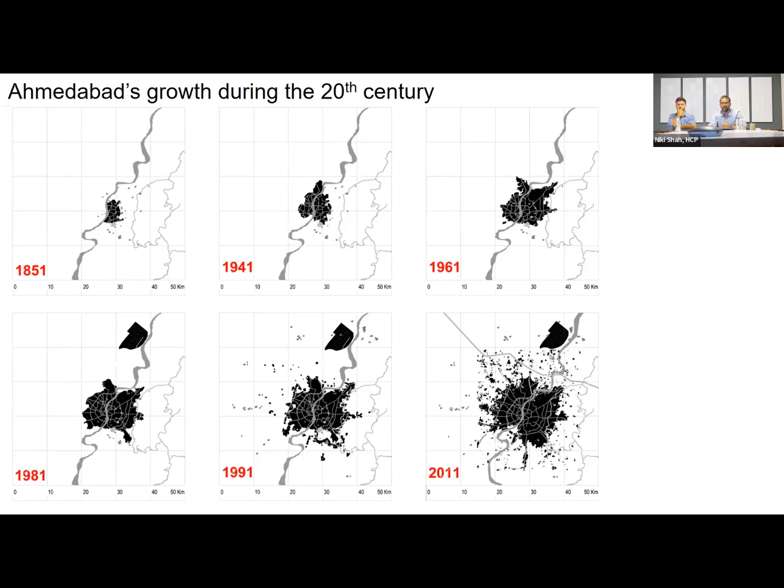It has flourished on both sides of the river, and ironically, it's a radial city - the planned city is radial in a way, and the river sits directly in the middle of it. So it grew equally toward both sides, with the river passing through the center, as you can see in this image of the urbanized area with the river in the center.

Sabarmati, like any river, I'd say the city established itself on the river for certain benefits. The Sabarmati always helped Ahmedabad get started - it was the prime, most important source of water for various uses. Eventually engineering took over, and they built French wells to get the water, which are still functioning.

Important and rich people also built recreational places - this is one palace which still exists; it's a gallery now along the river.

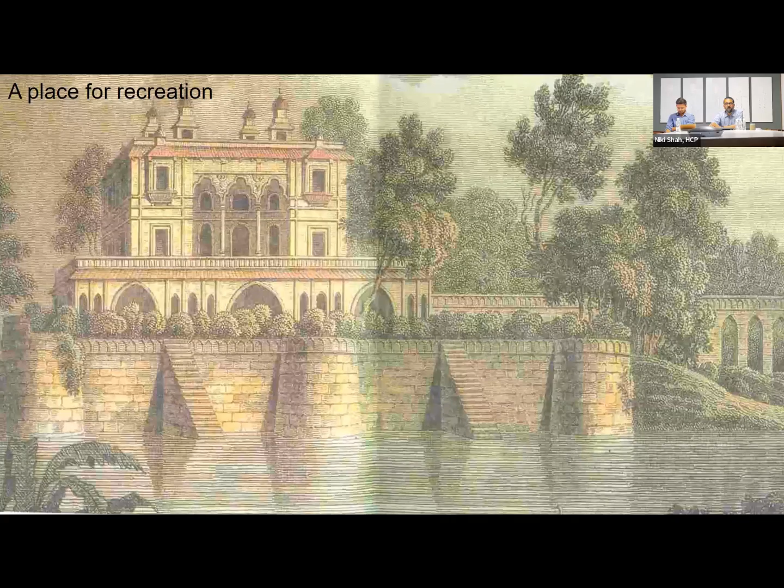Due to the nature of the river, because it was not a perennial river and was dry for many months, that whole ground could be used for multiple purposes. So Gandhiji, during his tenure living at Sabarmati Ashram, also used the riverbed as a gathering place, because that was the only easily accessible place, I would say.

And because of the sandy riverbed, people used that sand as a drying bed for clothes, due to the textile nature of the city. This is a famous picture by a French photographer who was traveling here in the 60s and took several pictures of Ahmedabad, beautifully capturing the river at that time.

This is also washing areas - lots of people used to come and wash clothes because the water was accessible.

There are smaller areas where people did local farming also, since this is part of the river. You can see the building behind is NID, the National Institute of Design - one of the premier design institutes in the city and country. And because of the free and available land on the dry riverbed, it was possible to build some houses there too.

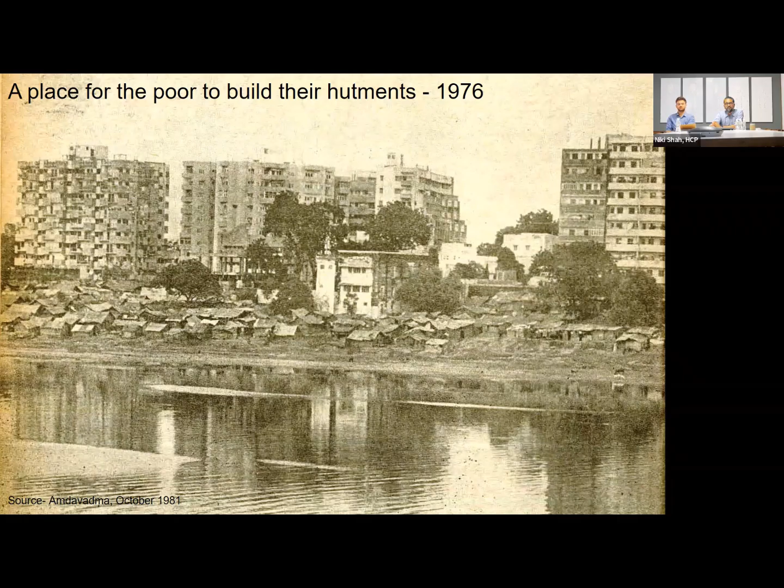So poor people built houses along the riverbed, and you can see the urbanized area behind. That continued for a long period of time, till the end of last century - many, many families lived on the river.

And of course, they needed a market, so this is a flea market, we call it - the people's market, a Sunday market which was established every Sunday for many, many centuries, I would say. That continued, and Gandhiji also built the ashram on the bank of the river.

Despite having all the benefits and characteristics of history, the city never paid any attention to the river. Eventually it became a dump for garbage, and stormwater also brought sewage into the river. So it was always dirty, polluted.

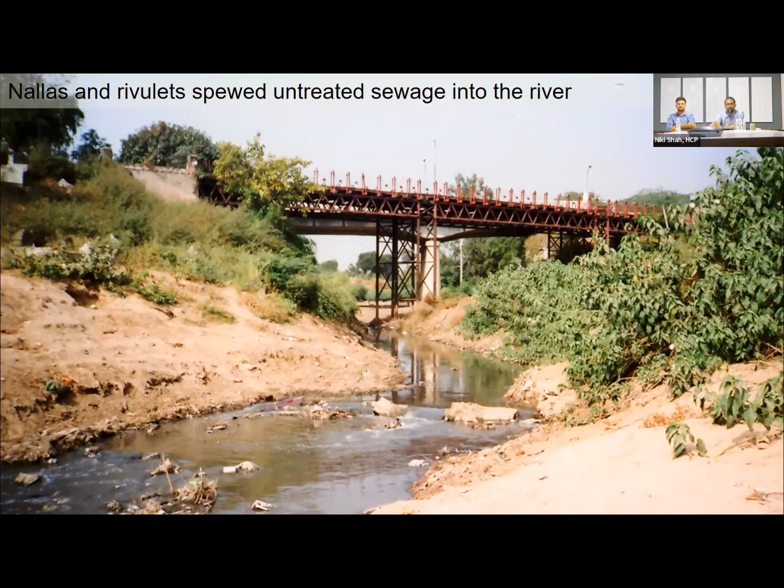This is one of the famous bridges linked with the Dandi Yatra, which Gandhiji did for the Salt March. He started the journey from this bridge, but below that is the outfall. And of course, the people who used to live on the river never had any proper services, so all the sewage directly flows into the river from the houses.

There are two ways. In the slums, the people who used to live were also encroaching on the water flow, and hence the water also went into their houses.

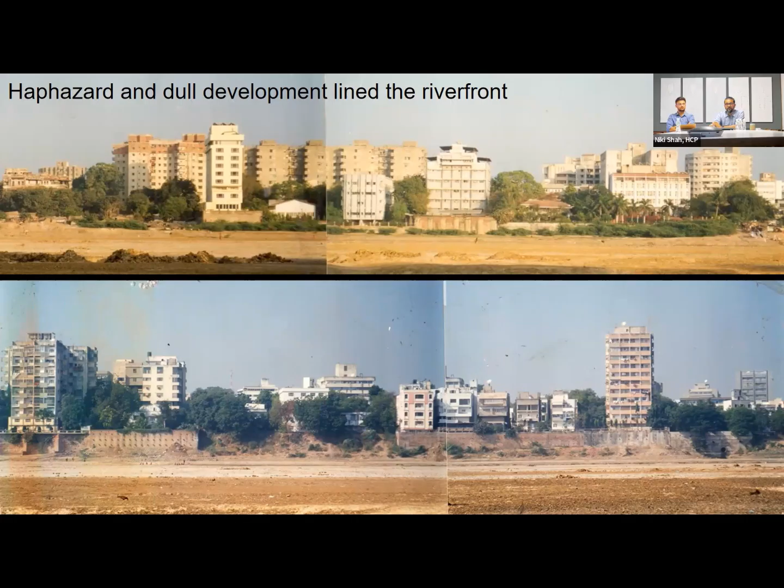And even for urban planning and design, there was no particular thought given on how the river or the city looks from the river. In a way, you can say it was 100% a privatized river, where individuals' plots were aligning on the river. So these are the kind of background issues which we had for many, many decades, and it was not accessible.

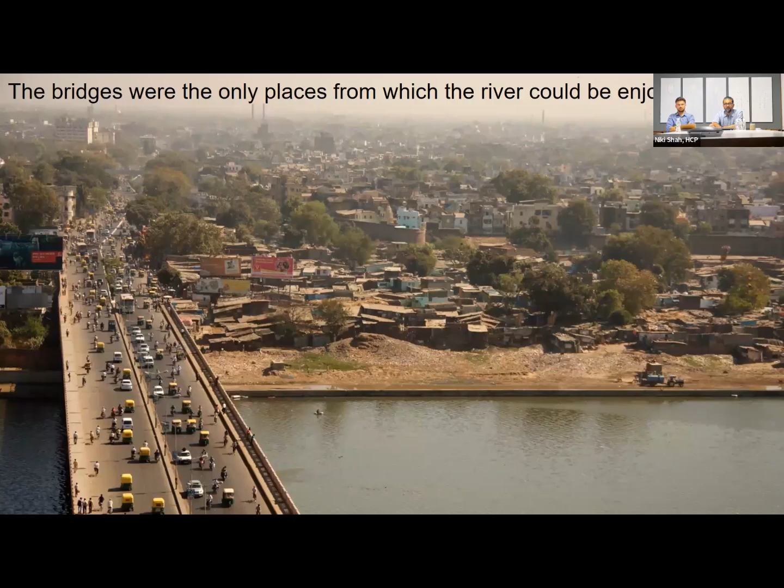The only place where you could have a sense of the river was where you could cross the bridge to go from east to west or either way. By the end of the 20th century, it was like the back of the house, or the backyard of the city. But that's not something unique to Ahmedabad—cities across India have similar issues.

If you see Pune, it also did a lot of work, but it never accomplished something comprehensive, and there were adverse effects from that. It polluted the river constantly. So this is the state we are also working on.

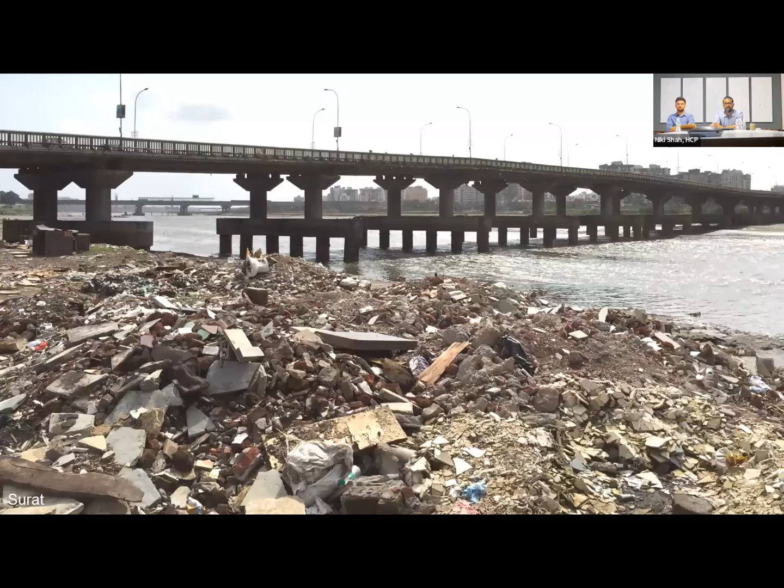This is a picture taken by us a long time ago. Vadodara also has similar issues—you can see a polluted river, a small river, but polluted, passing through the middle of the town. Surat, again, one of the larger rivers, also has the same issue.

Nagpur too. So if you see, all the cities have a similar problem, and one or two additions or solutions might have happened in various cities, but they are not comprehensive—they never actually solved the problem. And we have always complained about it. Even an important place like Varanasi is always difficult to manage in terms of the river.

But the waterfronts did not always exist. The infrastructure was built, rivers were cleaned, and riverfronts were developed as meaningful public spaces. Nothing was given—we worked comprehensively as a city and a river in the world, and then they managed to build up to here, which took many, many years.

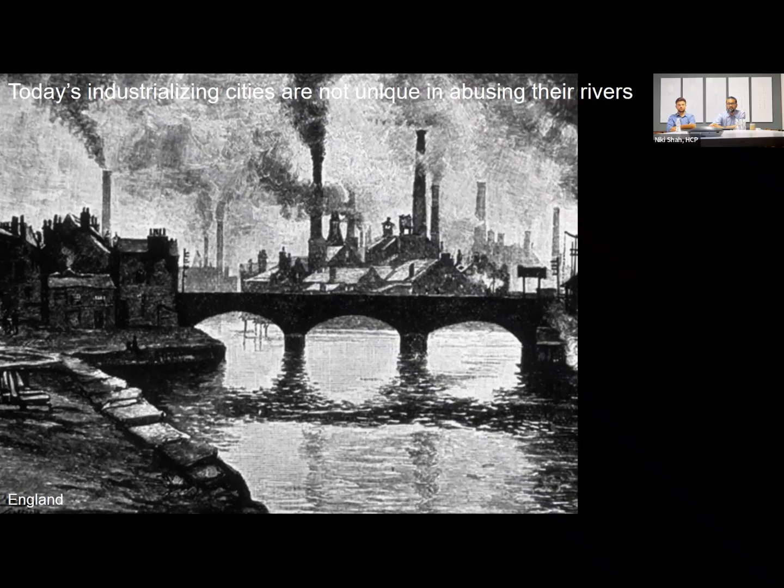This is a general situation, not only in India. In London, in England, there was a similar problem with industrialization in the last century—you can see pollution, industries abutting the river and polluting it. This is Manchester, again similar issues. London, again, in the 18th century, with important buildings directly abutting the river, but nothing on the river itself.

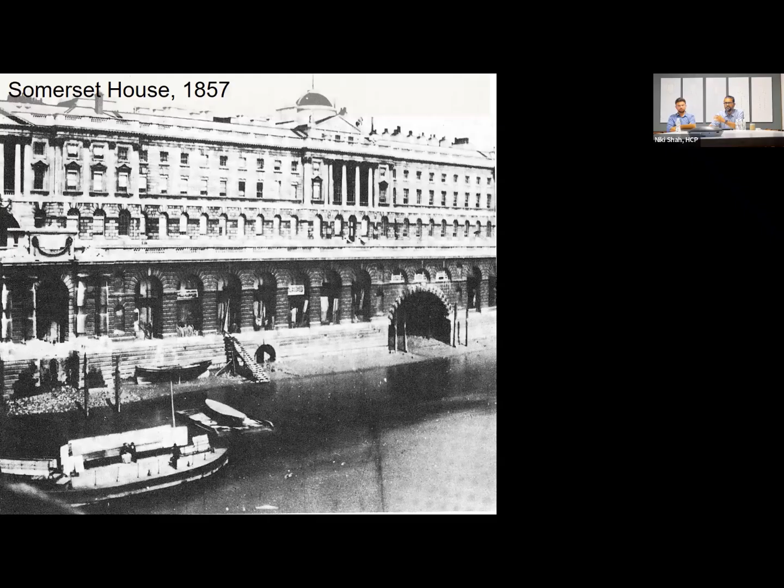On the left side you can see Somerset House, a government house directly accessed by the river. At one point in the 19th century, early 19th century, there was so much pollution in the river that such facilities were shut down. The river was actually unbearable in terms of smell and quality, and nobody actually used it.

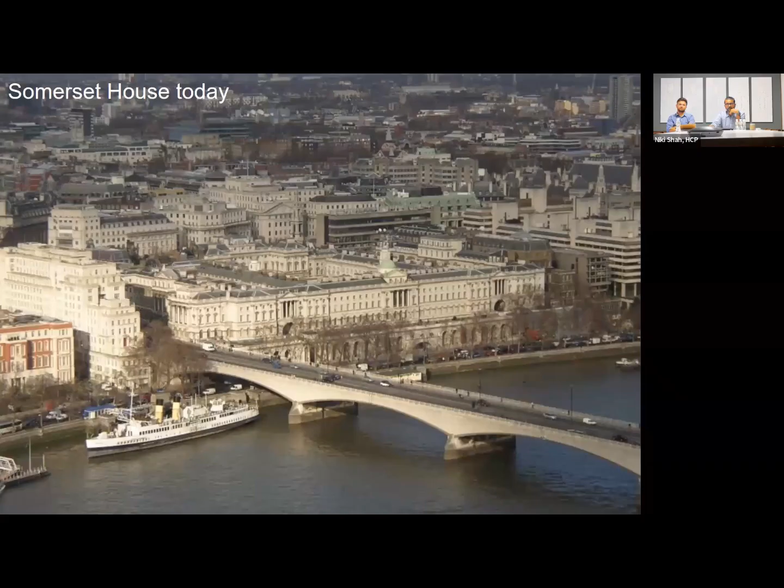So at one point, somebody had to intervene. This is an engineer who worked comprehensively on the Victoria Embankment, which we use now—these are early drawings and photographs. The purpose of showing this is to say, of course, we are not supposed to copy it, but the idea is to see how an urbanized area can be well integrated with the river, and how the river can be made clean also. These are the early examples; of course, now many cities in the world have done interventions in multiple ways.

This is all thought and ideas, almost 30 years now in this project. So all of this started 30 years ago for us in Ahmedabad.

At that time, we didn't have any precedent, and even India was not ready for urban public spaces. New York built, keeping the waterfront and urbanization coexisting. Singapore used to be a fishing town with dirty water and river—there's a fastest transformation project in the world which turned around. Chengdu also had slum and pollution issues, and they've done work on it.

The point of showing this slide is to say that cities are engineered landscapes, and eventually we need to solve this using some sort of technology or intervention to make it part of the city, and also save the river.

So then the Sabarmati Riverfront Development Project came into the picture. Just to give you a bit of water and regional context to understand, this is Gujarat. That's the Sabarmati River, around 371 kilometers long, originating from Aravalli Hill in Rajasthan. Ahmedabad is towards the Gulf of Cambay, relatively, along the Sabarmati River.

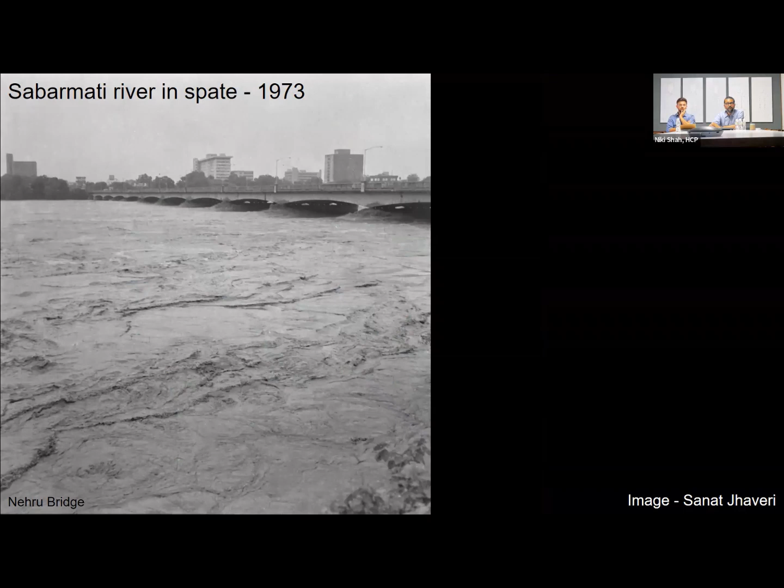This is the catchment for Ahmedabad—any rain in this catchment area flows through Ahmedabad. So uncontrolled water comes. This is an actual flood picture from 1973, one of the highest floods in the river, and it devastated the city at that point where the water was in the city technically. So at one point, like many irrigation schemes in the country, the irrigation department built many dams to control the water.

And also to store the water for future use. Still, beyond that, because the dam releases water when there's a threat to the dam, they release it in a few hours and the water still comes into the river.

While the project was in the making, we had the flood in 2006, where you can see the gravity of the situation. You can also see, because construction was happening in the river space, the equipment and everything is also part of the river—you can see it in this picture.

Additionally, the municipal corporation here in Ahmedabad also built the barrage to keep the water. This is all part of the larger irrigation scheme which happened many years ago, before even the riverfront was part of anyone's thought. The barrage keeps the water in the river, stores it, and diverts the water for irrigation downstream.

Otherwise, this water would just flow into the sea. This is a relatively drier region where water is important for irrigation and drinking. So this was one of the schemes at that time.

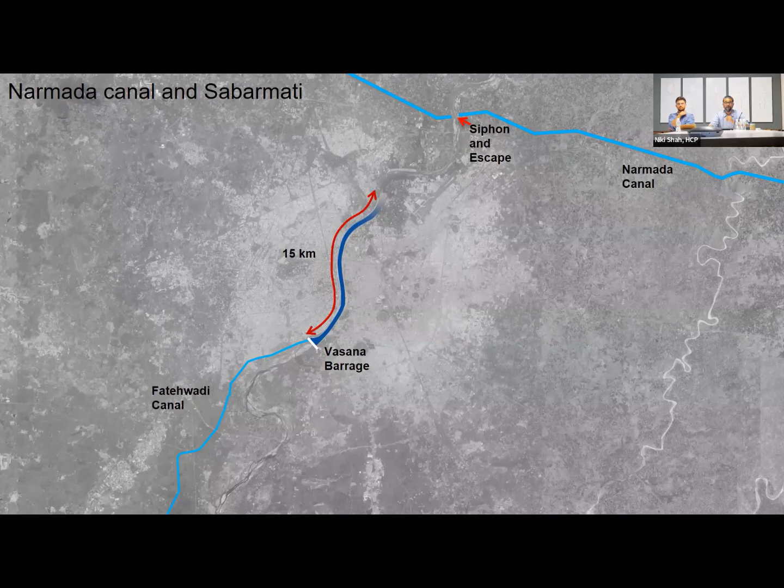You can see in the text the Fatehwadi Canal, for the southern part of Ahmedabad—where the Narmada Canal cannot reach, bypassing the water is a means. So that's all an irrigation grand scheme where water is connected from various rivers to the drier areas for irrigation. Eventually, because of the barrage at the southern part of the city and the Narmada water feeding from the north...

It has actually become a lake, you can say—not a flowing river, but a lake. Ahmedabad has many small and large...

Neha, can you please mute yourself? I'm so sorry. Nancy, you have to instruct everybody to mute themselves. Request everyone to please keep their mic on mute. I think it was only once. Sorry, please continue. That's okay.

So there are lakes, definitely some of the important ones like Kankaria and Chandola, and now the river itself is a lake. So as a technicality, when you talk about the water, this is not a flowing river anymore. It was a dry river most of the time, a seasonal river, but now it has water because of the Narmada. These are all preconditions before the project started.

So it's not only what you see just now as Ahmedabad Riverfront, but there were many attempts in the past where people thought about how to intervene and improve the waterfront. In the 60s, a French architect, Bernard Kohn, who was visiting India, did some sketch proposals and gave them to the CM at that time to talk about the need to do something. Of course, the city was very small at that time, the economy was not flourishing, and we were a very big, new, independent country. So nothing much happened beyond that.

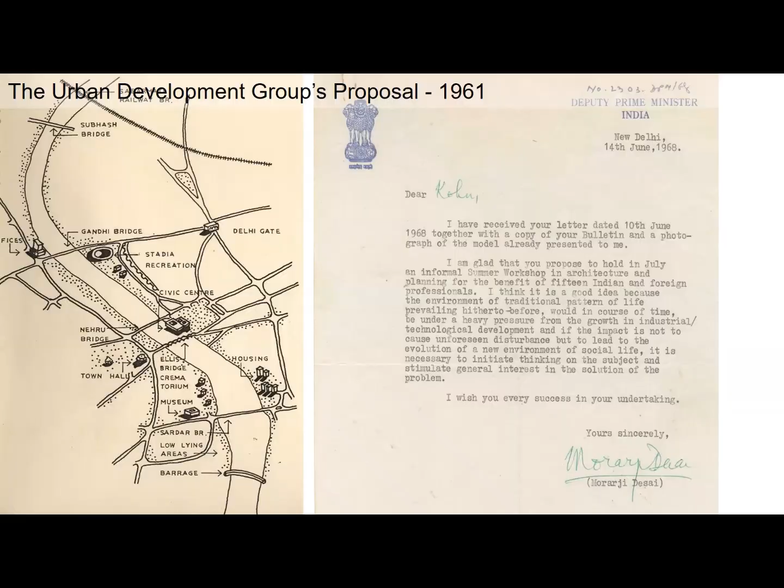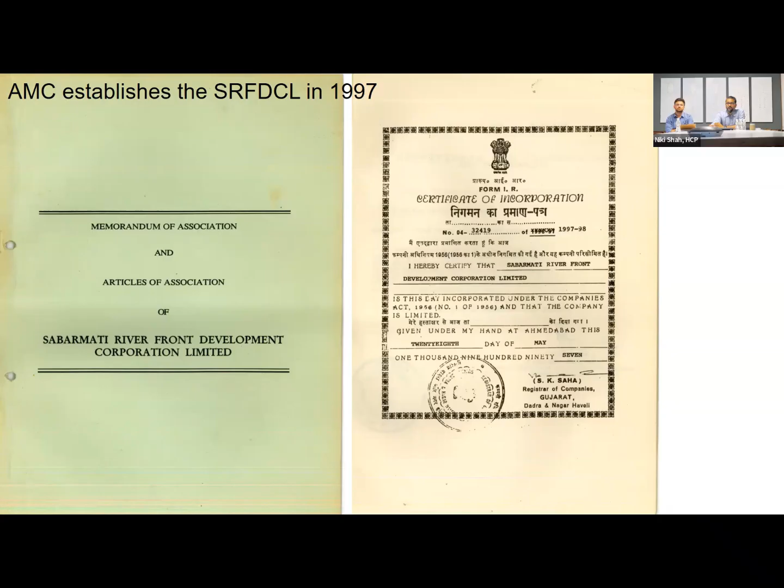Then came 1997, where it was determined that the city is growing and we need to do something about the river. So a separate company was formed to manage the project, the SRFDCL corporation. EPC was in planning, and a non-profit collaborative organization, which is our sister company, was assigned to do the initial feasibility report to check what can be done.

So for the first time at any such scale, a comprehensive report and study were done over a year, covering many subjects documented to come up with the proposal. It talks about water recharge, infrastructure services, resettlement and rehabilitation, and of course cost and finances. All previous proposals focused on ideas, but if you don't have an idea about the cost and the revenue, none of these projects will be realized in real life. So that happens, and a lot of management needs to be done.

It was a different world at that time, 30 years ago, 25 years ago. Now we are seeing many such projects, so we are okay to accept them. At that time, it was very difficult to convince anybody that this is important for the future.

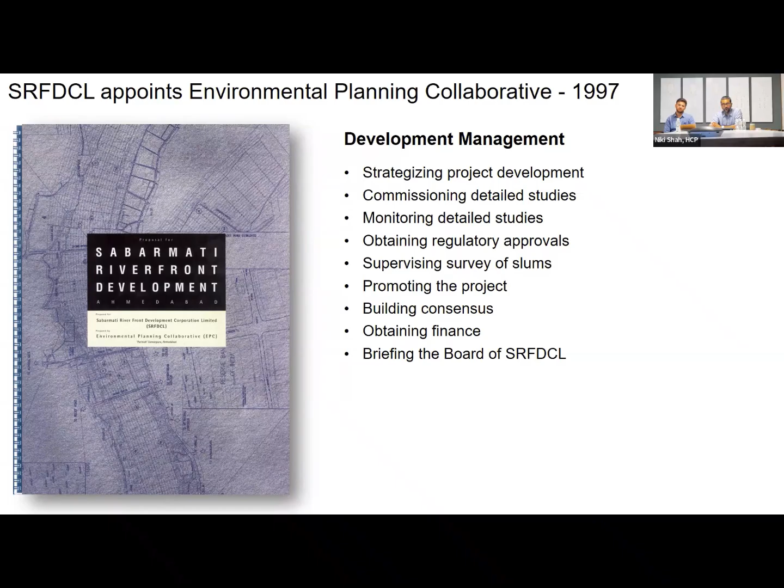So the broader objective was environmental improvement, social development, and urban rejuvenation. There are 11 objectives, I'll go one by one, though I might be behind time.

As you can see in the picture I showed you, it was a dry riverbed most of the time, and the city's population then was around 5 million, I guess, 25 years ago. Now it's 8 million. For that population, we didn't have this natural resource. Ahmedabad is a flat terrain, we don't have any hills, mountains, large lakes or river where we can actually go.

We had the river, but it was not really accessible. So the primary objective was to make it accessible, to go from this to this. Now the only way to do it, because we didn't have the land and everything was privatized, was to kind of go into the river to reclaim land and build the public asset.

So these are a series of maps. You can see this is the river, and new land was formed, around 2 square kilometers, where we did a lot of public development. And these are technical aspects, of course. This all needed to go through technical scrutiny. None of this project happened without technical backup and a lot of studies. So it has gone through...

Kavan needs to go for 10 minutes, but will come back. Meanwhile, I'll finish it, no problem.

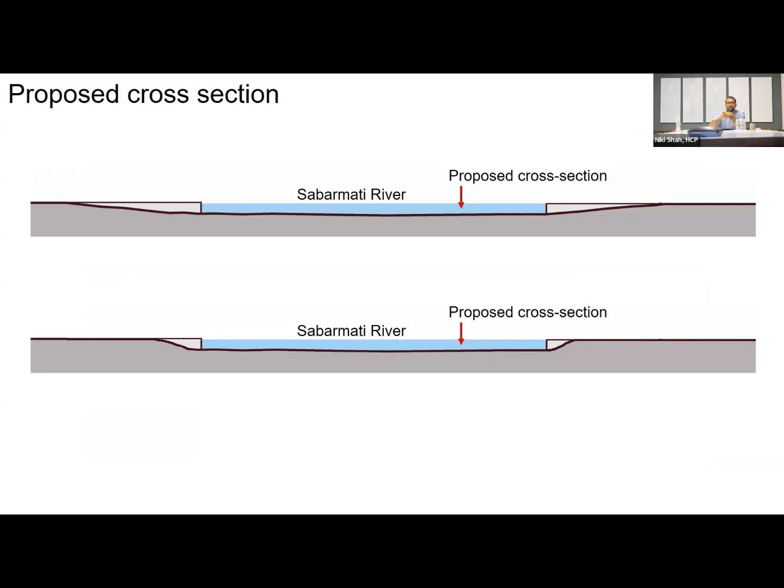So beyond that, from the existing river to the proposed river, where the flow of the river is unobstructed, it can continue during the normal season and the flood season, the monsoon season. But beyond that, you have a lot of land generated to make it better used.

So quickly, some technicality, but this is how the lay of the land was with the water level, riverbed, and the high flood level. Now, high flood level is the determined line where we have to respect that.

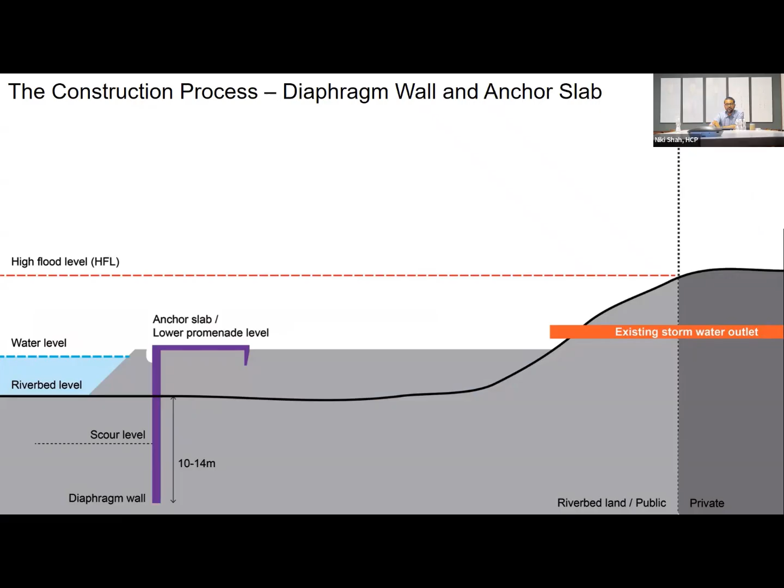So these are initial construction pictures, you can see new land formation from the sand from the riverbed and a platform. This is a sandy river, so it needed a strong foundation, otherwise it will wash off. These are early pictures of the construction, and it needed an anchor in the ground. So that is what the diaphragm wall is meant for.

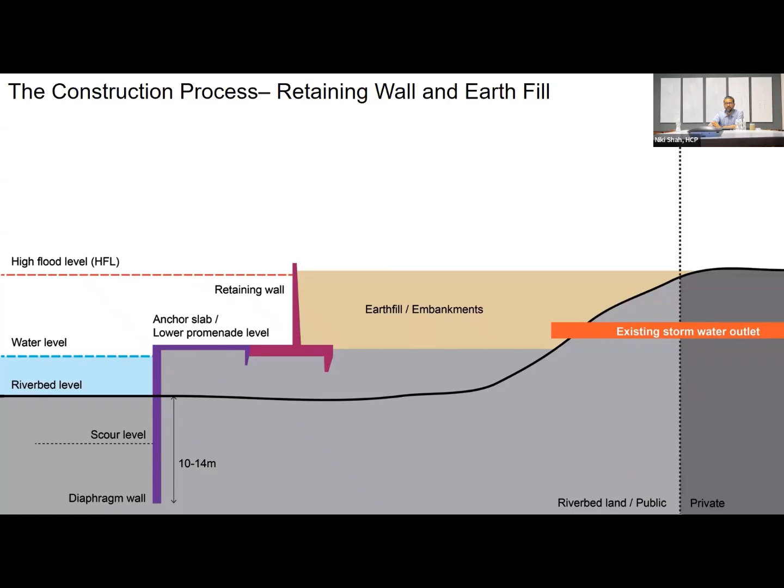This is 2007. You can see a part of the edge is built, and beyond that, the high wall is built with the flood level. Keep in mind, in this case, it's a concrete wall, and the concrete wall is not consistent in terms of height.

If you see the typical long cross section, the ground is sloping, but because of the barrage, the water is stable, I mean zero, but when the flood comes, it follows the terrain in the slope. So the retaining wall has a different height. Upstream you have a taller height, and downstream you have a smaller height. So when you experience the waterfront by walking, you will see a different scale and size also.

And then this is the construction picture early on, and of course it had all the access points at frequent locations and ramps. Beyond that, you have land which is generated, which is also reclaimed, and that is where all the new facilities will come as a part of the waterfront.

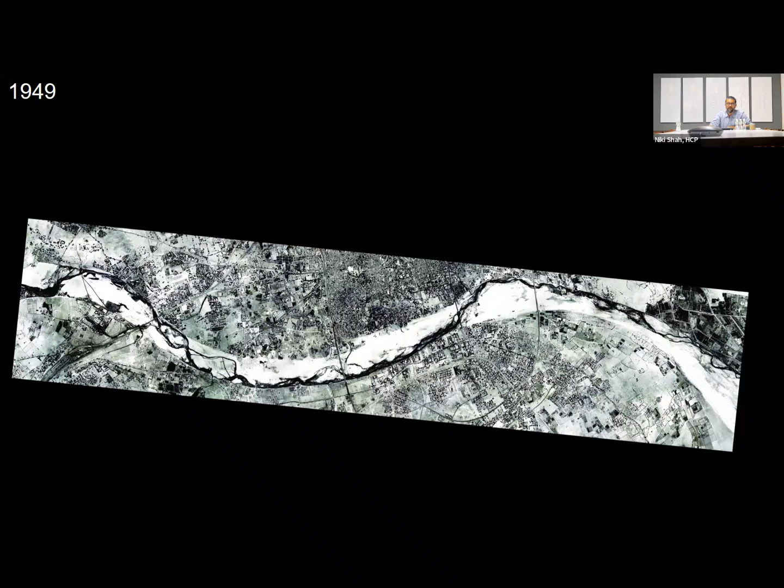So if you see this 1949 satellite image or imagery, you can see the flow of the river at that time, and 2001, and how it has gone about. This is 2020. Of course, beyond that, we also have new updates, and that is what it looks like.

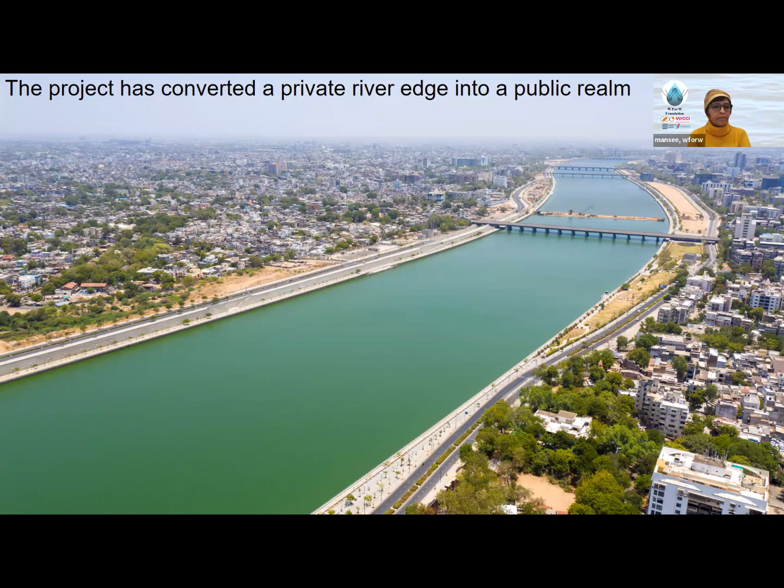So if you remember the old picture where it was all private edge, now it has a 100% public edge where everybody can go freely up to the water and also access all of the other facilities. So that's the objective checked. And of course, when people gather, it looks very lively, and it's not just infrastructure - it has become a place now.

Another primary important thing: after doing all of that, if the river is not clean and nothing is done for that, then nobody would still go because it's going to stink. That's the quality the riverbed or the river used to be, with outfalls at various locations, and that's the quality of water. You can see people throw coins and people find coins. So that's the situation in our country.

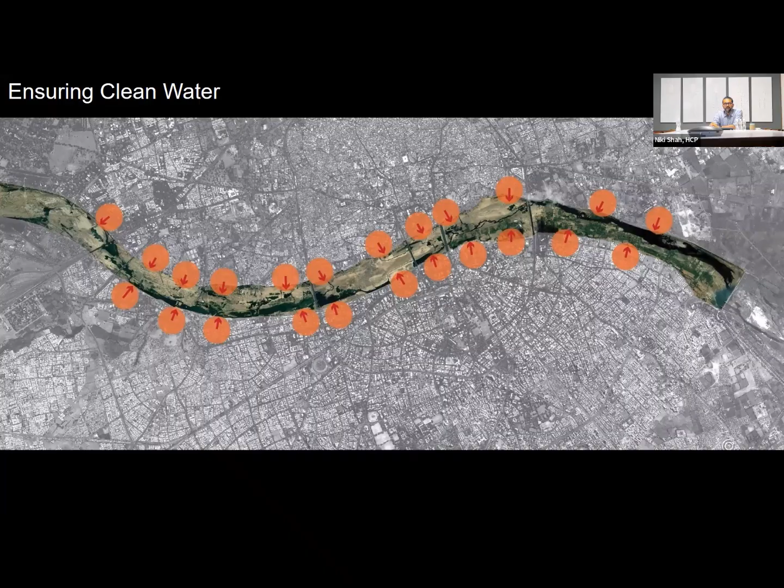There were 34 such odd places where the sewerage used to come from the city. There was no dedicated infrastructure for that at the time, and there was no land for infrastructure also. So as a part of the project, we had to build large scale infrastructure to curb the water coming and eventually divert it into treatment plants.

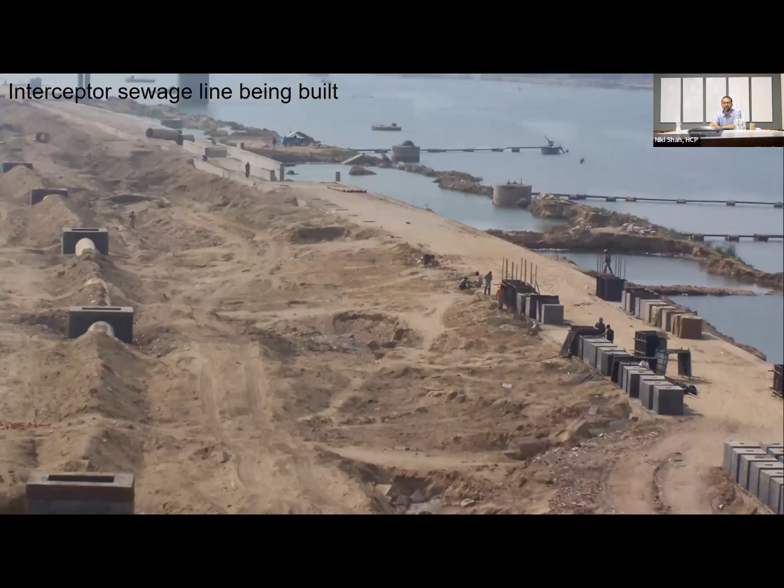So all the sewage which used to flow directly into the river is now diverted into the treatment plants, which are also safely encased in the land which is generated, so that it doesn't need to be very expensive. And those are a few snippets of the construction, this is in 2005, 2006, roughly 20 years ago now.

And after that, of course, the river became cleaner, and beyond that there are constant efforts to keep cleaning the river at multiple points, and the quality will keep improving as we go along. There is also constant cleaning happening on a daily basis in the river, which is a superficial thing, as we as people throw things in the river because we are still not civilized enough not to pollute our natural resources. So all of that is still there, but there are machines who can clean those also. So there is a constant effort to keep it clean.

The benefit of having water in the river is that it can recharge the groundwater. So having that much water throughout - these are some numbers, but basically it talks about the amount of water it can store, and that same water is going to seep into the ground, and it's going to benefit the aquifer and increase the groundwater table also.

Now, this is not because of the riverfront project itself, it is part of the larger irrigation system. So it was a byproduct, you can say, that was bound to happen. And there are informal studies done by the company - they can see that groundwater has improved in the surrounding area.

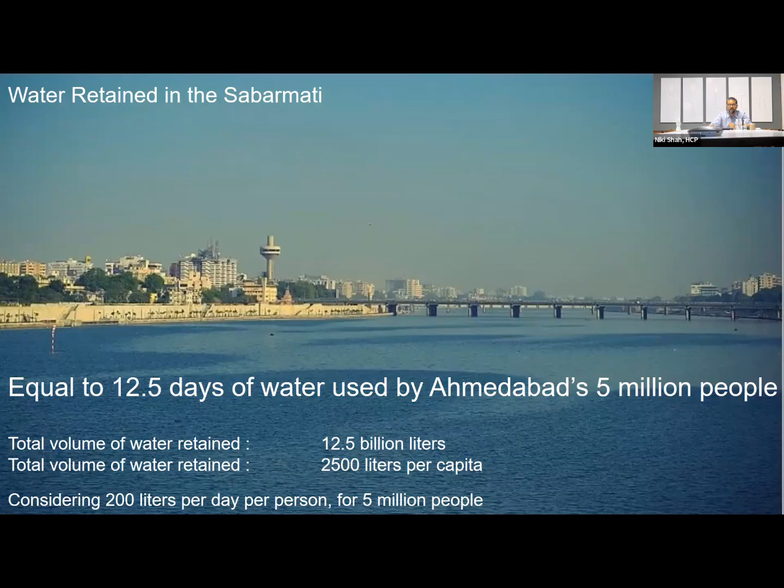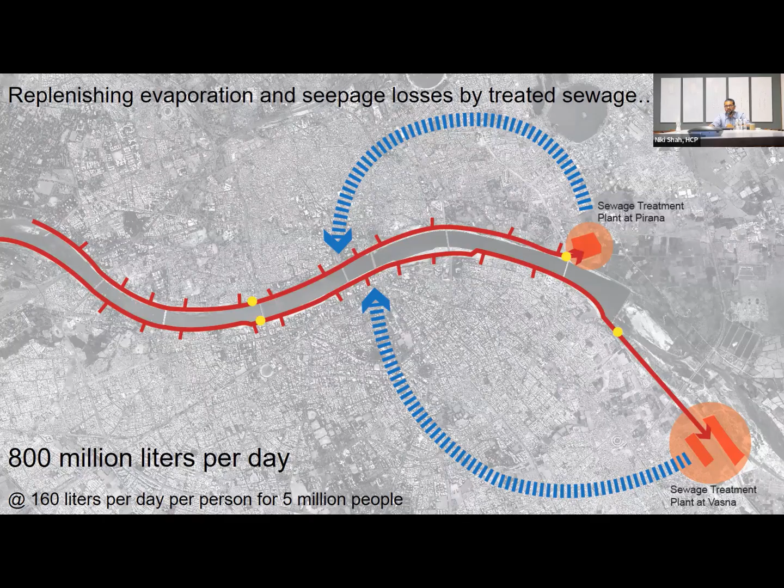Because this is relatively stagnant water, there is seepage and evaporation, so the water needs replenishing. It used to rely on the Narmada for many years since it was part of the irrigation system, but now efforts are being made to put treated water from the sewerage in as well, and more treatment plants are being built so there is constant treated water flowing into the river, reducing reliance on Narmada water.

So there is an effort to close the loop, where the city's polluted water earlier went directly into the river, but now it's diverted to a treatment plant, gets treated, and is put back into the river, so that water is always there throughout. This has been widely talked about in the media.

Another big challenge was that when we build infrastructure projects or urban scale projects, there are many stakeholders, and if we don't include them as part of the project or the problem solution, some of the projects never happen.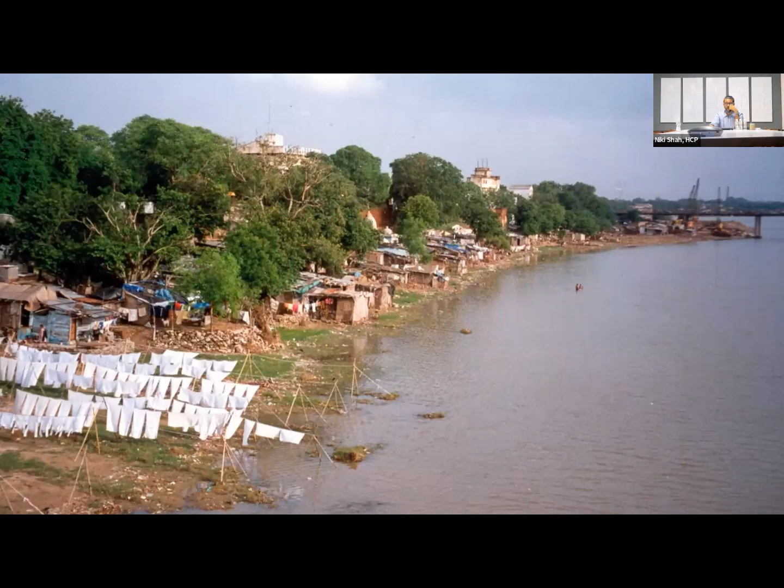This was a challenge for the municipal corporation at that time, where 11,000 families, around 50,000 people, used to live on the riverbed in poor conditions without any infrastructure, and always under threat from flood. Every year when the flood came, their houses got damaged and they had to rebuild.

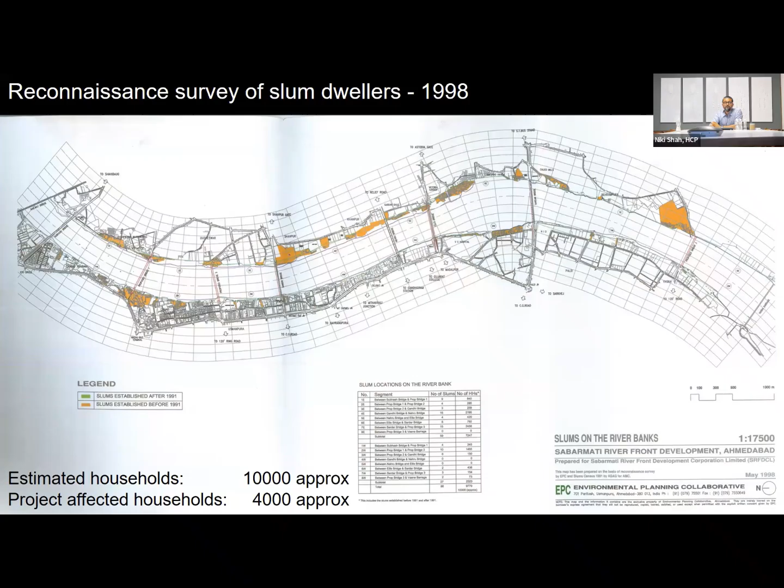You can see on the map all the yellow color marked areas where they were housed at that time. To build this, they needed a solution.

A detailed socio-economic survey was done house to house, door to door, like a census, and everything was recorded. This was managed by the corporation and social activists, and everything was eventually documented.

The city, the corporation, had a lot of public land, and that land within the neighborhood of the existing urban area is where houses were built. The entire process was managed and chaired by the High Court, with allotments for the housing done one at a time.

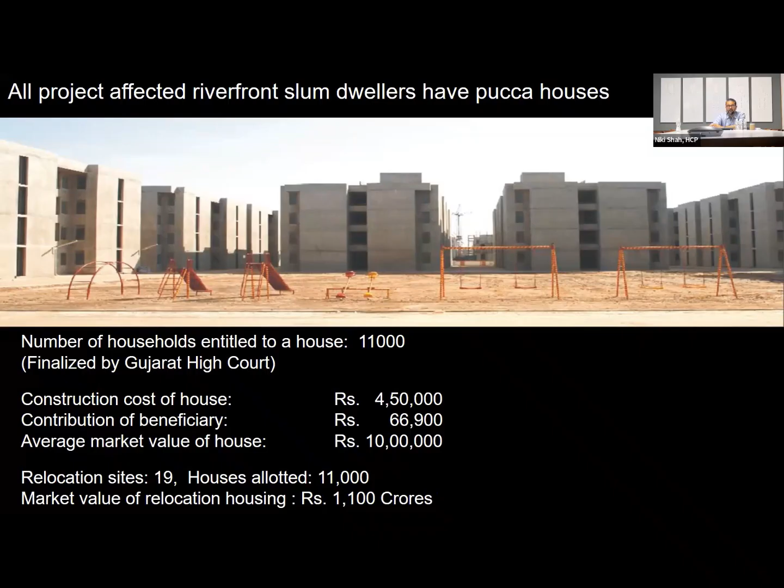These are the housing units transformed from unsafe, no-facility conditions to at least a basic one-room kitchen where families can live safely with proper civil construction. That's the community space outside, the normal neighborhood and streets within the campus, and that's what it looks like as time goes by.

Because of the sandy strata of the river, there was always erosion of the land, given the overall lay of the land. There are also a lot of low-lying neighborhoods where constant flooding and erosion used to happen.

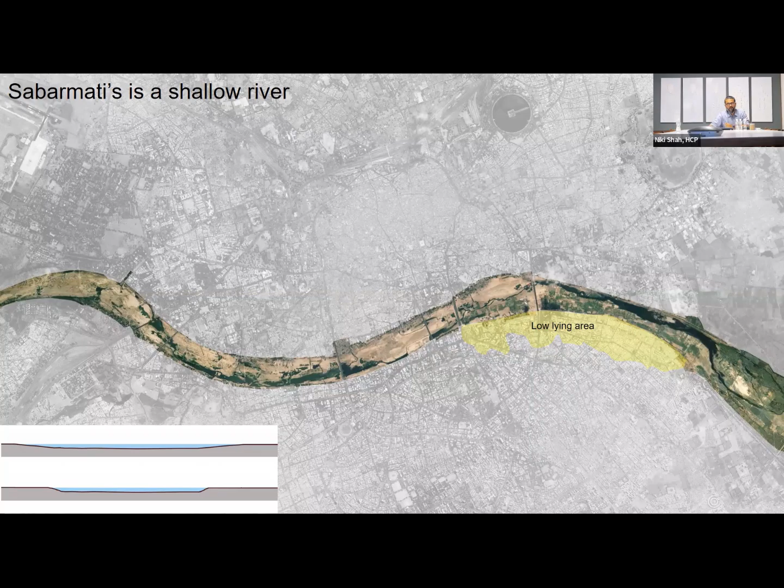That's the amount of flood you can see, and nobody can stop this. Whoever had the capacity individually built their own retaining walls or safeguards against the flood to protect their properties, but this was done in a non-uniform, inconsistent manner, which could also be a threat during flood impact.

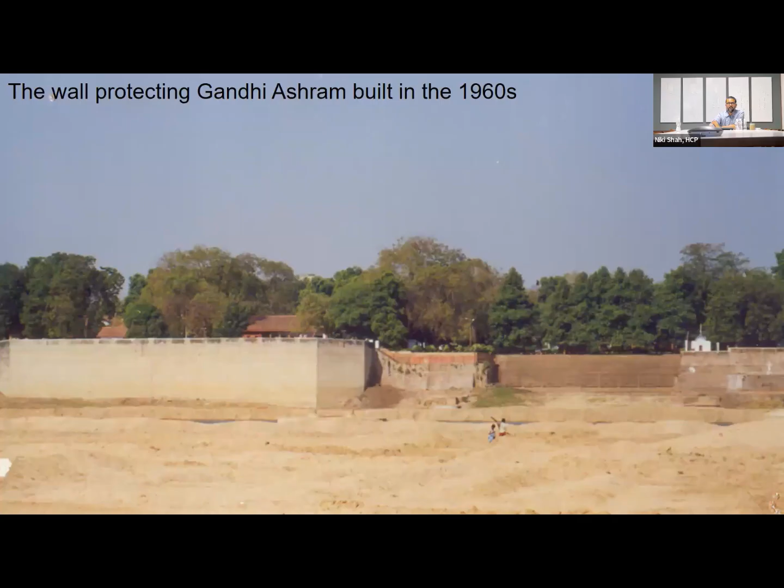Even important buildings like the Mill Owners Association building designed by Le Corbusier had to build a retaining wall to safeguard itself, and even Gandhi Ashram had to build something to protect itself. These were all independent efforts, and the rest of the area remained unprotected.

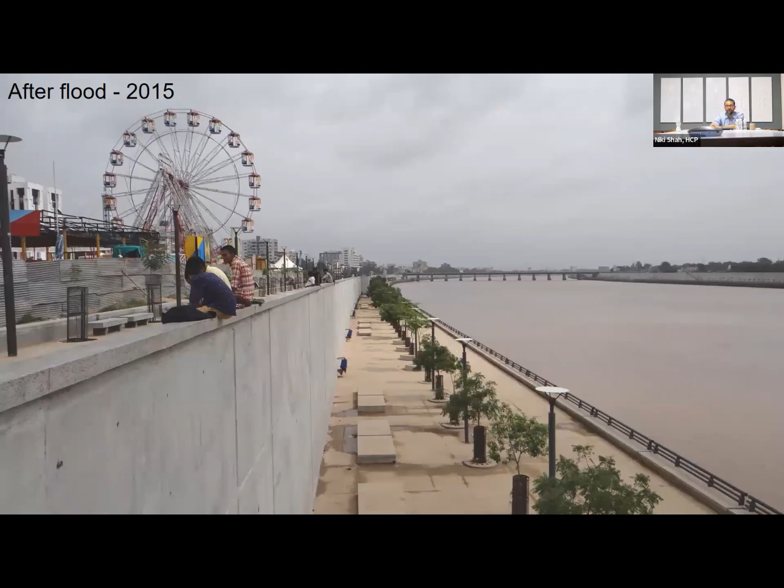So the idea was not to have this kind of checkered, inconsistent construction, but to have a public safeguarding element, which is now the embankment. You can see during the flood the Lower Promenade walkway actually gets flooded, but after a few days it's cleaned and opened again. This protects the city from immediate or frequent flooding, and now both sides of the city are relatively safeguarded.

Then solving all these problems, now this land is available, and the first thing we have to talk about is what people can use.

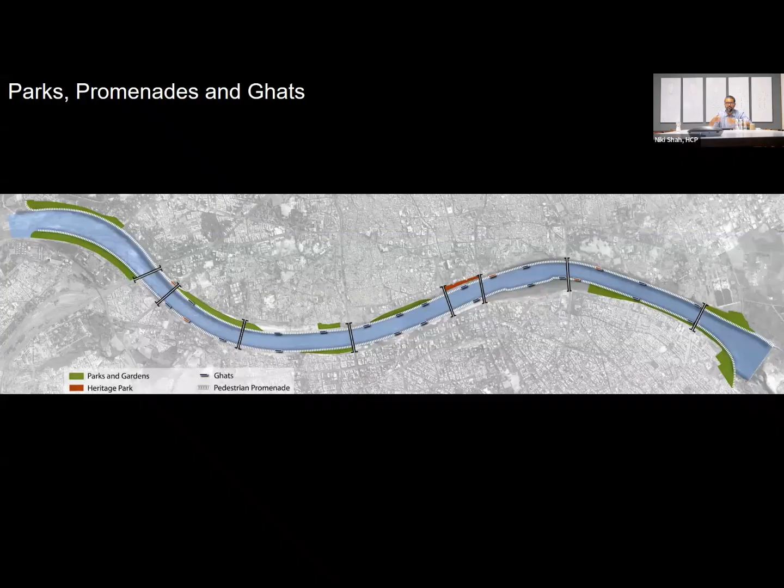So there we will build promenades and parks, and it's an opportunity. It's a highly urbanized area with relatively very low green space per person, and we don't have many known parks. We have only 2 or 3 parks known at that time, relatively small in size, and always jam-packed and crowded. Beyond that, we don't have anything in the city. The land, 2 square kilometers, gave an opportunity to maximize the use of this land for parks and gardens. So around 55% was kept reserved for that at various locations, looking at the context and the type of park or space needed.

We also needed to communicate well, because while the construction is happening there's a lot of talk, and it's one of its kind, and everybody will say, why concrete, why is there no, everything is commercialized. So we have to say, we are making parks, we are going to build this. This place is going to convert like this at one point as time goes. It's meant for people.

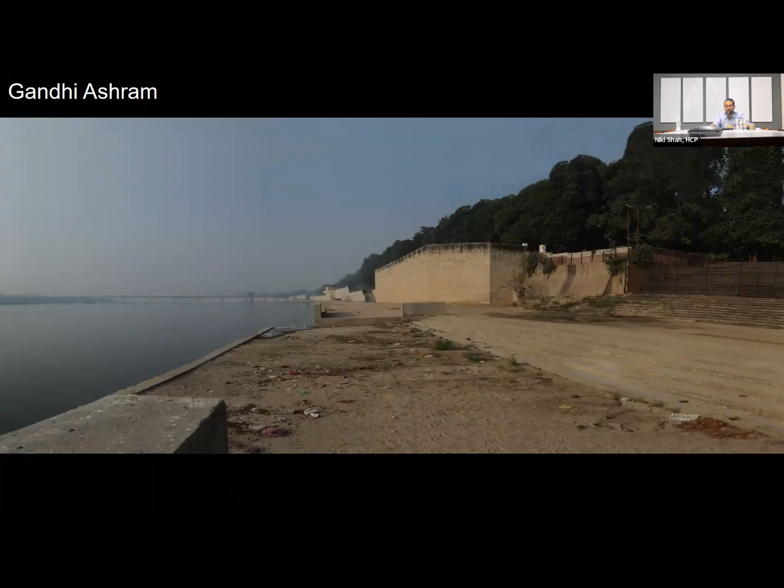Even while we are making this, this is going to be lively at one point where people start using it, good trees will grow, and the Gandhi Ashram, with the additional waterfront, will look like this with access from the Gandhi Ashram. So these are all early visualizations to showcase what an Indian public space is going to look like. Nothing flashy, nothing European or American that way, just to say this is what it may look like with our people.

There were many unbuilt proposals to have a large-scale sports ground. Lots of kids from different strata neighborhoods come just to play cricket, and we don't have enough of that. So maybe part of the riverfront we could do this. This is yet to be built. These visualizations were imagined 15, 20 years ago, but now it's getting built.

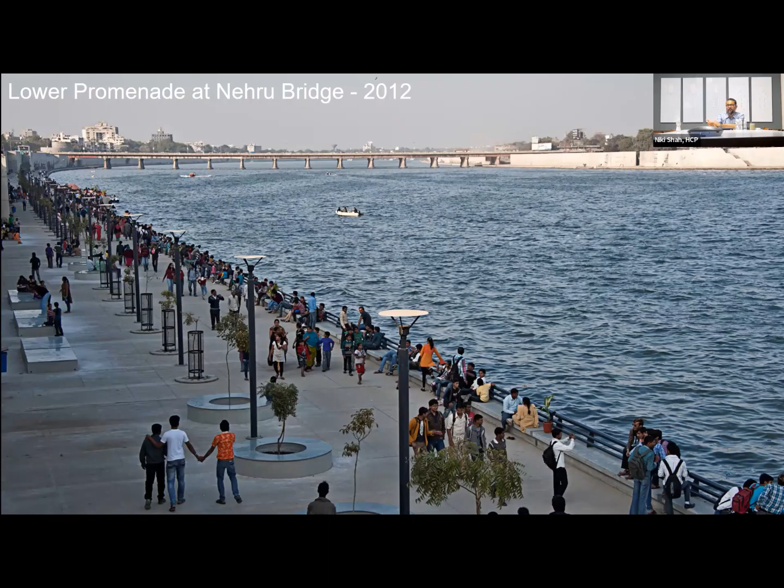So people have started using it. You can see the crowd along the water, and now water is actually part of daily life. Promenades are part of their daily lives. They come daily, morning, evening, weekends, all of them with friends and families. And it is something which is now obvious, you can say.

So some pictures of what life looks like around the waterfront - exercises, kids, families. Even Ahmedabad never imagined having something with the water, so boating also, with more of a recreational aspect.

And of course, all the religious activity which used to happen before is now integrated with proper facilities, so during crowded situations they are also safer. This is one of the important religious functions that happens in June, July, and the facilities for that. So people have proper access, and kids and youngsters also go there for studies.

And that's what it looks like now, recently. You can see trees are growing, landscape is growing, and people are using it.

Parks also, of course, we have a lot of parks. So this is the original picture with the reclaimed land. Now you can see additional parks and access. And many large-scale parks and facilities were also built over the years.

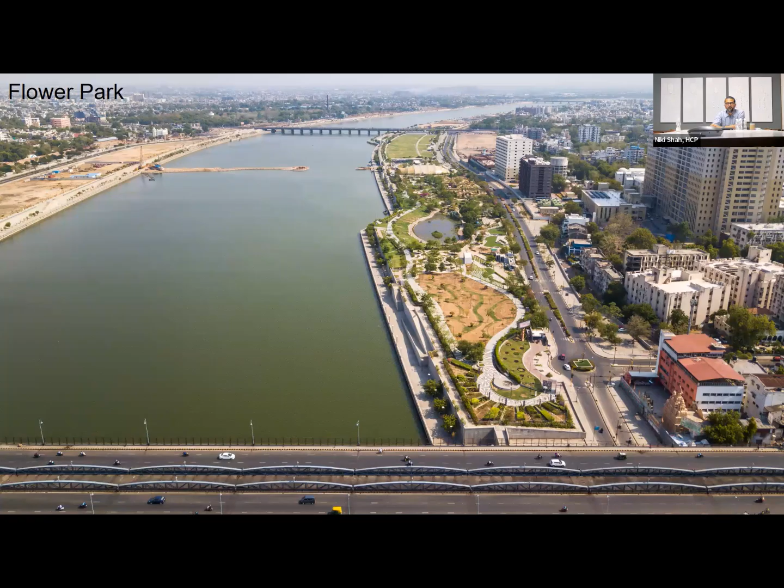These are all now accessible to everybody, and these are a couple of old pictures. Now the trees and landscape have matured and it always feels like it was always there. There are parks designed for special functions also - this one is for flowers, to showcase the flora and fauna. There are event grounds also to house many public events. And a children's park dedicated for the small kids.

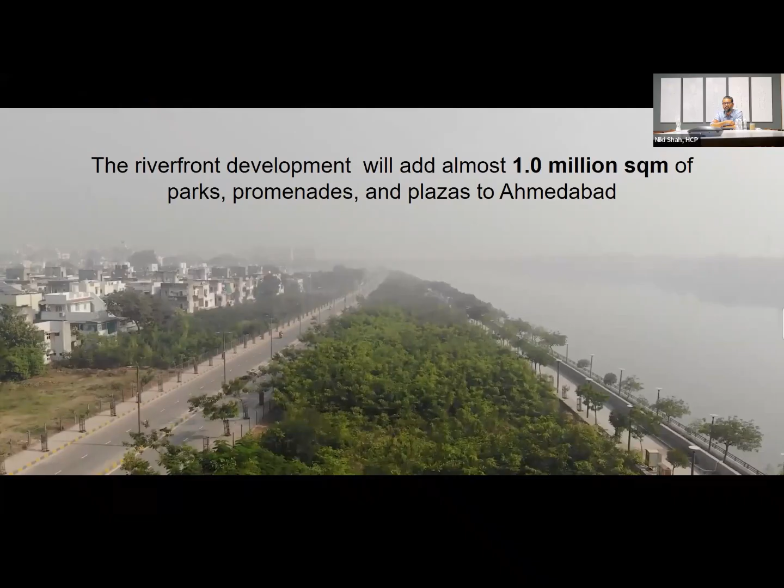And also the forest - so it's not only accessible urbanized public parks, but a portion of that is forested with Miyawaki and many other solutions. This has grown over a couple of kilometers due to this. So the riverfront development will add, or has actually added now, 1 million square meters of parks, promenades and plazas, which is way beyond what was already existing in the beginning.

Beyond that, this is a place for people, and it will attract many social amenities. This was the hub because it already had existing public amenities like Sanskar Kendra and Tagore Hall, which also housed public functions. So part of that, there was a market scheme, you can see, and that's more or less realized.

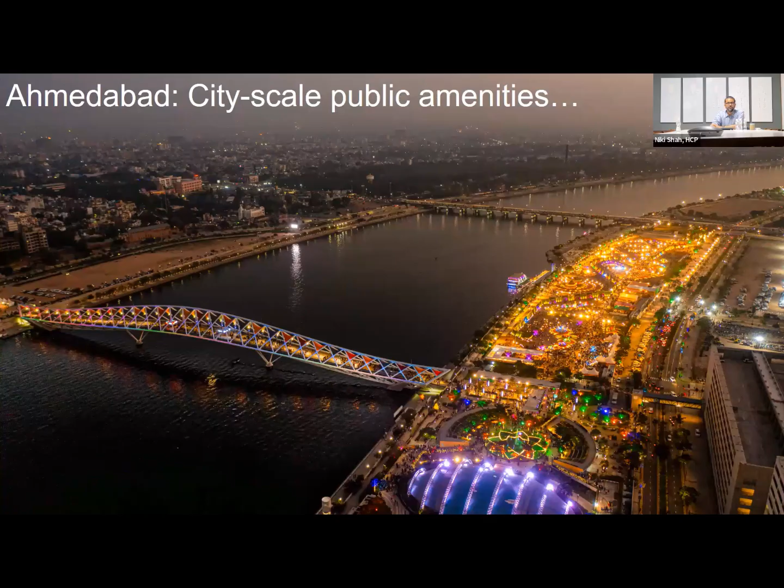Part of the proposal is being done in the future. You can see the event space and the pedestrian bridge, which is already built, were part of an early visualization some 15 years ago.

And very, very important two aspects of the project, like slums or the housing part. This is the market, and it was an important public place where people used to go and shop on every Sunday. It's a day market.

It was happening at one corner on the river, and during the flood it doesn't function. It was not really accessible and safe to go. But as a part of the project, now we have a kilometer-long organized market, accessed from the same route, so people have the same memory to go.

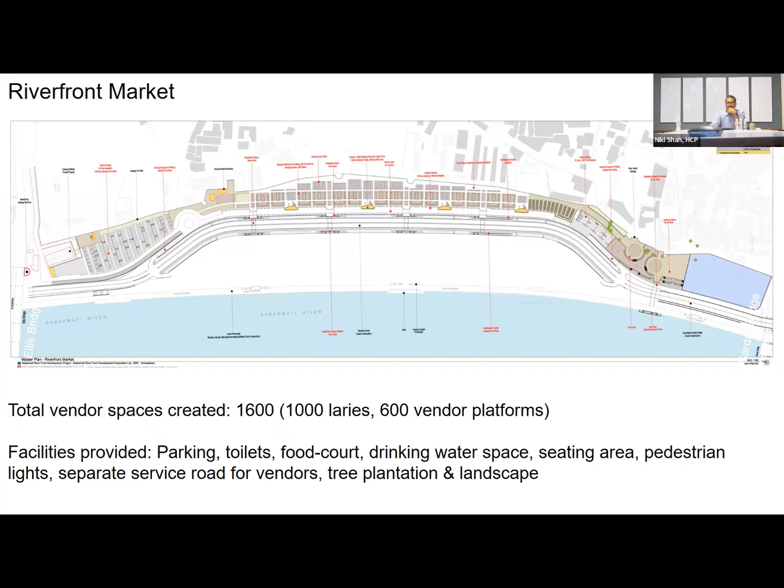The same kind of market continues. Lots of washing facility used to happen. This was the state at one point. A lot of chemicals were used, and it used to go in the river. But now there is a dedicated campus with a modernized facility, and 160, 70 of them were housed with this facility.

Also, the use of land was judicious next to the water treatment plants. All the dirty water goes directly into treatment, and the terraces were used to dry the clothes. That's the campus where families are there, kids are there, so all of them spend the whole day here. This is actually a business for them.

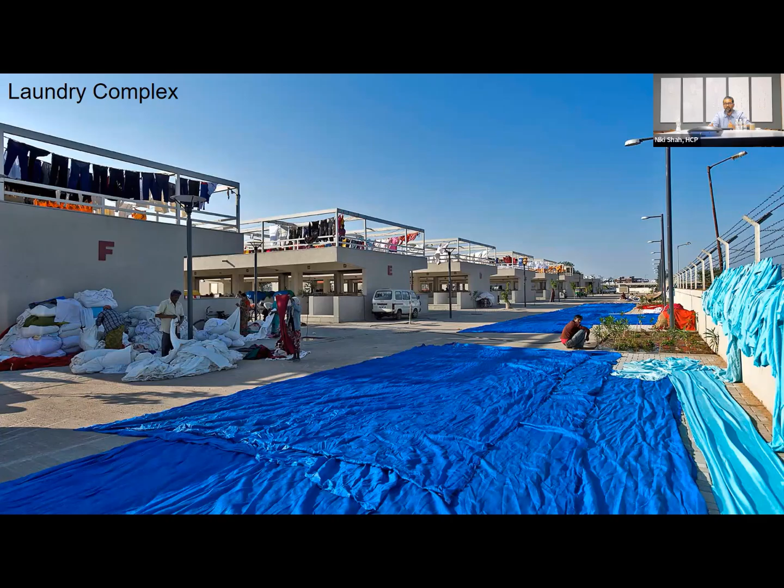So socially all integrated in one project. Sports centers, the city needed sports facilities. Now it's more evident, this was done 5 years ago, due to future events going to happen in the city, and large grounds for temporary events.

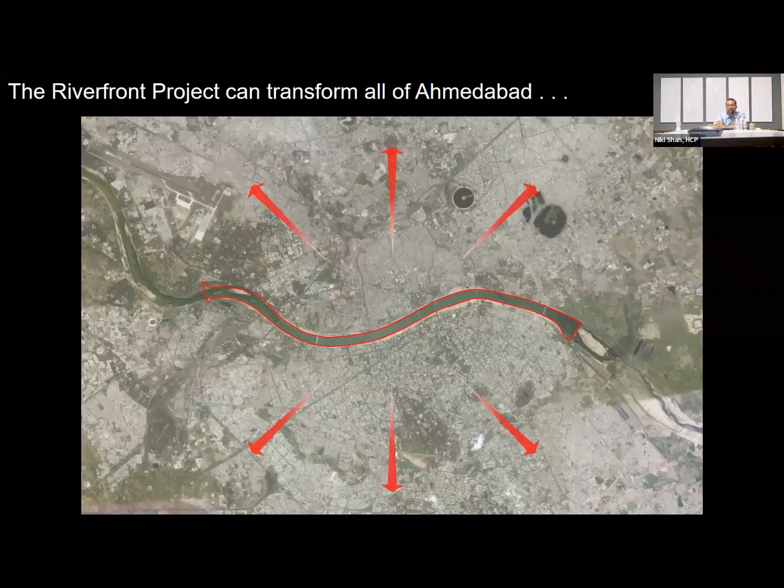Projects like this are not independent in terms of its impact. When you do some sort of intervention in an area like this, it's going to impact the surrounding for multi-purpose aspects. So part of the project was to think about how these different districts, or precincts as we call them, will look like, and how we can improve those precincts also.

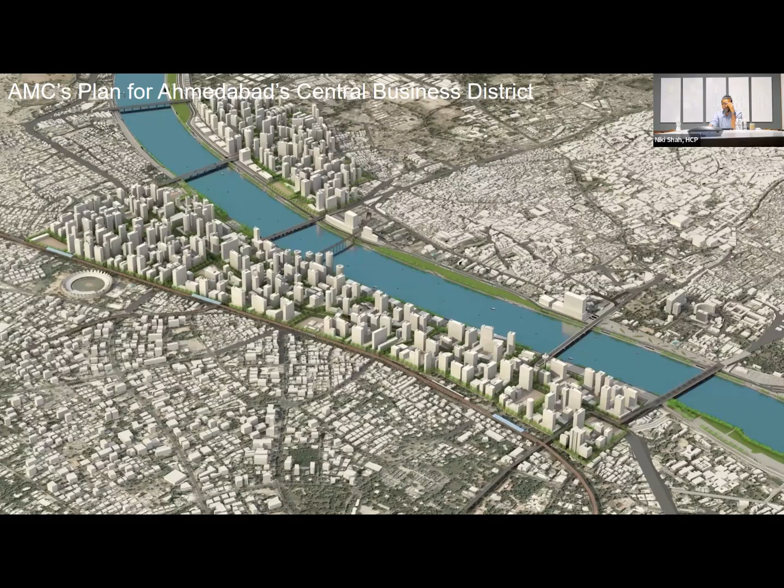It was a nudge to the city that we should do it better, so that the city and the water are integrated well, and not just a strip of development. An example is the urbanized area, because it's the center of the city, the central business district, and how we integrate them from the real estate perspective was one of the aspects also visualized—the skyline of the city as it progresses in the future. This is a small portion of the city, not the entire waterfront will be like this.

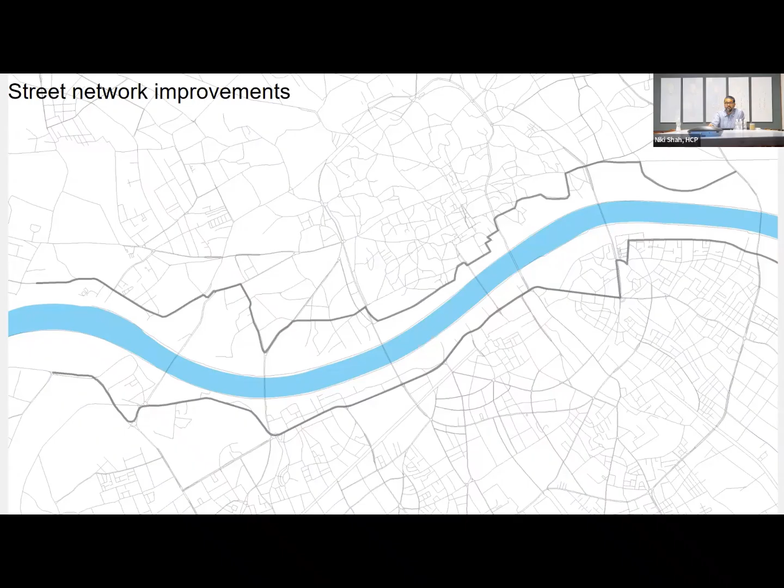This additional land also gives the street network a lot of traffic relief. This is the street network in the past, where we used north-south traffic in a very rudimentary manner, with crowded places, always traffic jams, and only a couple of bridges to cross.

This project gave an opportunity to add a few streets, which can ease off the traffic for the city, and that's what it looks like now. Now traffic, connectivity and mobility are distributed. Currently there are cars, but there are pedestrian walkways also.

Eventually, this is going to be converted into a long run of some sort of public transport, imagine a tram going up and down the length, not cars. But these are all projects for generations. Once you build the foundation, it will keep growing and changing based on the time, and that's what it looks like.

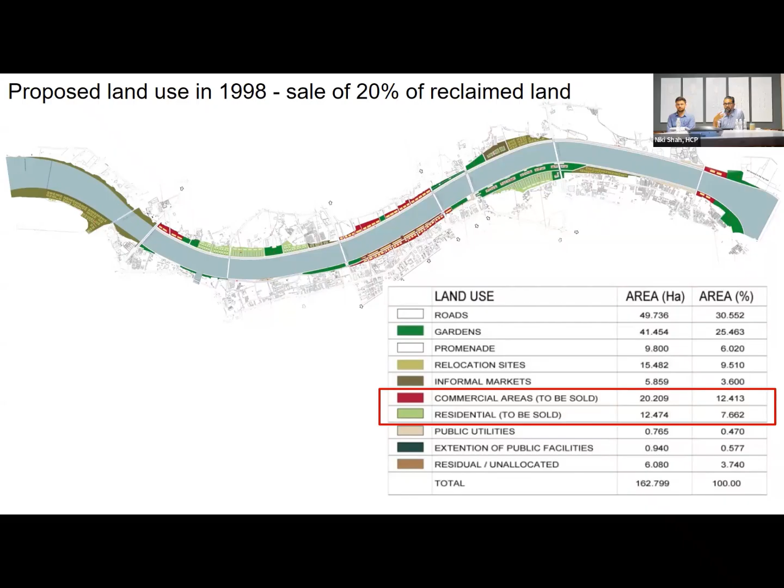A small portion of the land was set aside in the very first master plan. You can see in the 1998 master plan, 80% was reserved for public purpose, 20% for commercial development to offset the cost. But as time went on and real estate values changed, that 20% reduced to 14%. Now 86% is meant for public amenities, with only the critical areas kept in reserve for future development, where we can earn revenue and offset the cost, so that the cost is not a burden to the city primarily.

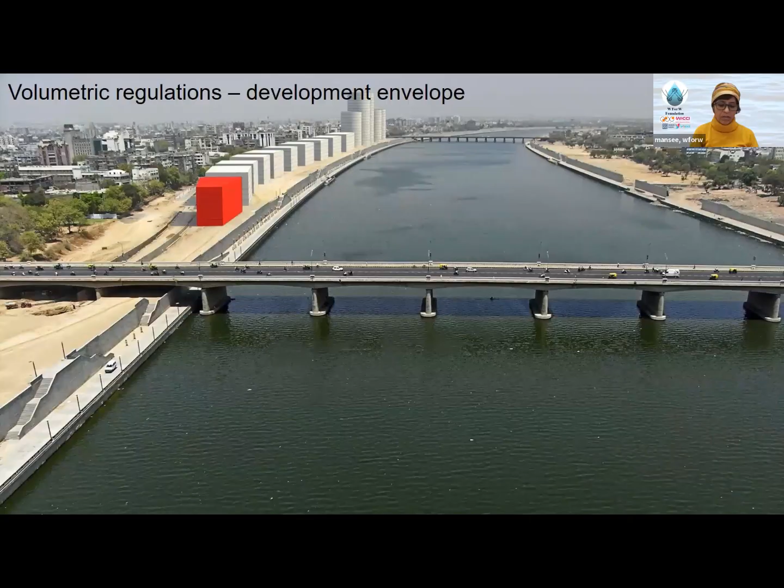From the planning and urban design perspective, there are also improvements happening here, but that's not the topic just now. The experience of the building and the surrounding place will definitely be different than the regular city which we have.

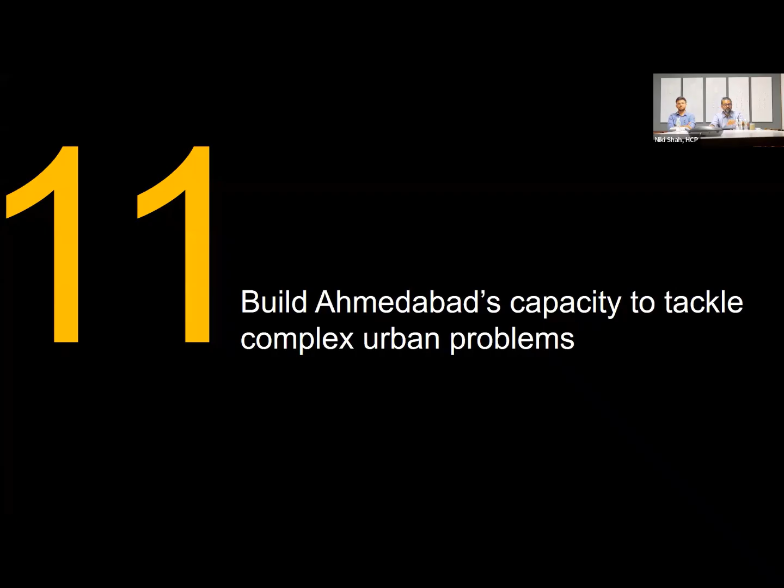This particular project brought a lot of people together as a large civil project. It was a byproduct of how people actually worked together, from politicians to stakeholders to activists, to many people. It also shows the capacity to tackle complex urban problems systematically and consistently over the last 25 years, and that a spirited democracy can work to produce a quality public place.

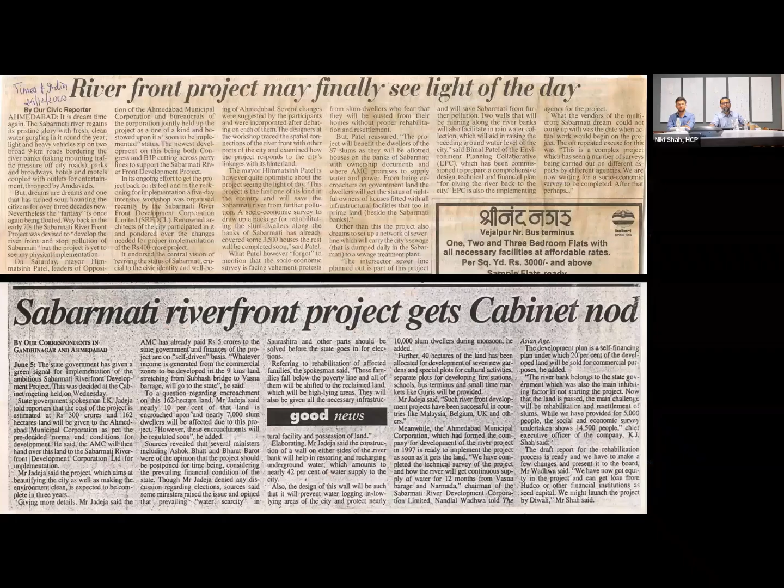Lots of third-party verification happened. This is one of the projects that was much talked about, positively and negatively, and there were always counter opinions, and all of them were tested.

A lot of public exhibitions were put up to make sure that transparency was maintained, to showcase the project. Lots of people saw it in public forums.

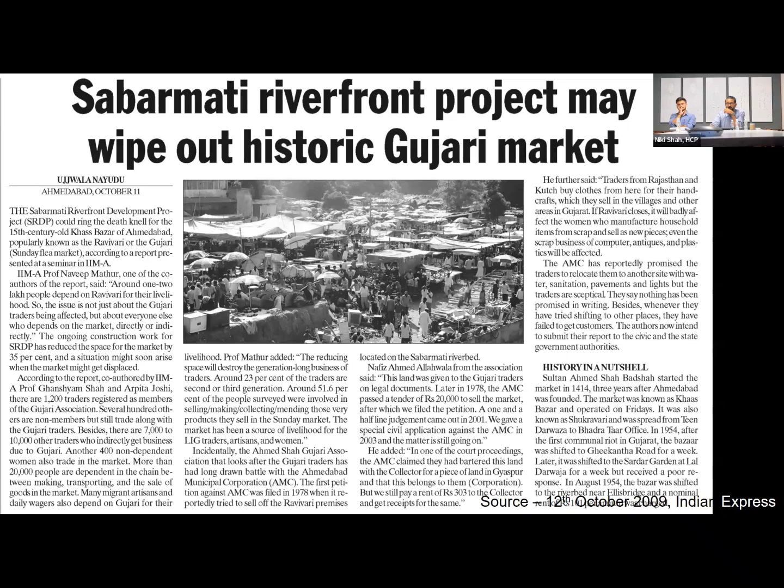I'll skip all of this because it's all there in the public domain and can be accessed. There were a lot of complaints and contrasting opinions. One article said it was going to wipe out the historic Gujari market, and another said we're going to get a new address. So people are always going to talk in different ways, but all of them are addressed, responded to, and documented well enough to make sure they are resolved.

Now we talk about public space often, but at that time it was very difficult to communicate to the people.

So maybe, Niki, shall we open the floor now? Or, no, just a second, I have 7 minutes. Kavan has to speak also. Okay, I'm going to speak now.

One point I want to make is that for any effort like this, if you want to do something in any form, it doesn't matter the particular type of urbanized solution. We're doing a very contrasting project in Pune and other cities where the approach and the solutions are different based on the context, but there are aspects we cannot overlook, and everything has to coexist.

So it cannot be only about water, or only about the landscape, or independently about making a commercial development. It has to work together, depending on the context and the need, and all of it has to be done comprehensively, not unilaterally. So if something is to be improved, we cannot think one-sided.

This is a multi-generational project. Of course, the success of the first project is going to bring more. This was only 11 kilometers in Ahmedabad, but now the river comes from the north, through Gandhinagar and a new city called Gift, and many urbanized areas around. So not only 11 kilometers, but all the way to Gandhinagar is being thought about. We are fortunate to work continuously for another 10 kilometers beyond the city, north of the same river.

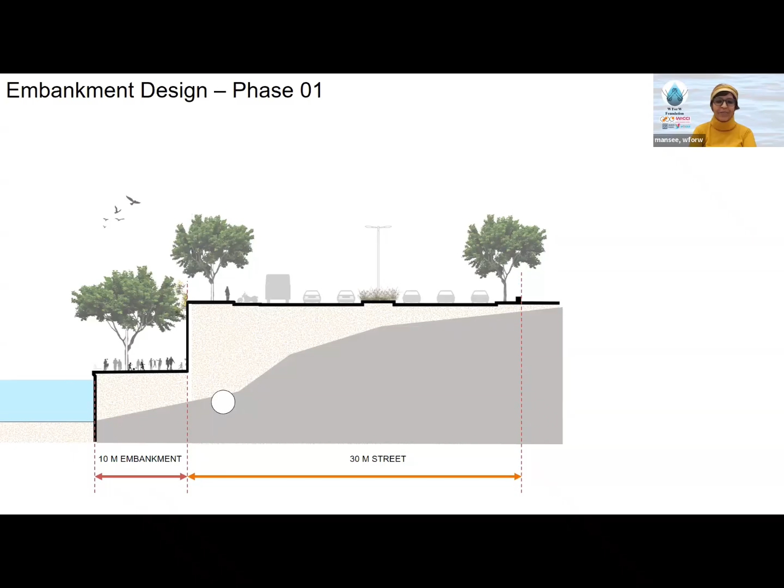Kavan? Thank you. Maybe keep it very crisp, because we have to take questions from people. Absolutely. So, yes, go ahead.

Largely because there was a land constraint next to it, and then we also had to plan the road network, so the embankment was only restricted to 10 meters.

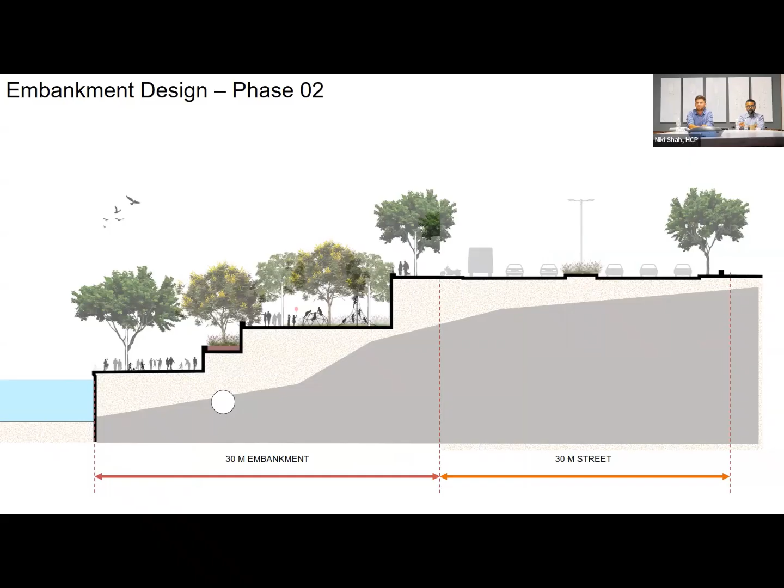If you see phase 2, it has a lavish embankment of about 30 meters wide, with a lower promenade as well as a middle promenade. I'll come to that, it is much more greener as well. Subsequently, phase 3 is also modeled on the same design principles of phase 2, because all of them are in the peripheral stage of urban expansion, and not necessarily has the city restricted those edges.

There's a sliver of riverfront, about 1.5 kilometers in between, which we had managed to envision as a stepped embankment.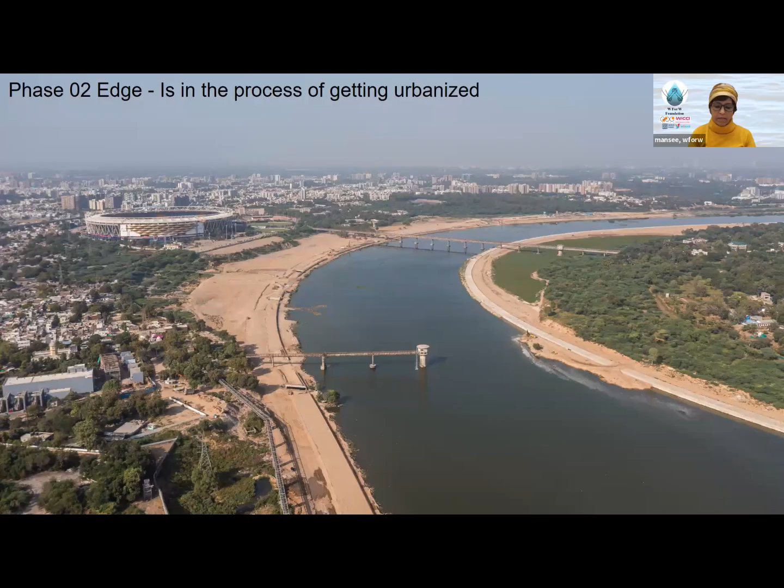So cities cannot have a standardized approach when it comes to riverfronts, it is a very context-specific design. One of the main reasons why we were able to pivot our design philosophy from phase 1 to phase 2 was that the edge is heavily urbanized, whereas in phase 2 there's a lot of land and a buffer area where actually the embankment and the streets can expand and eat into.

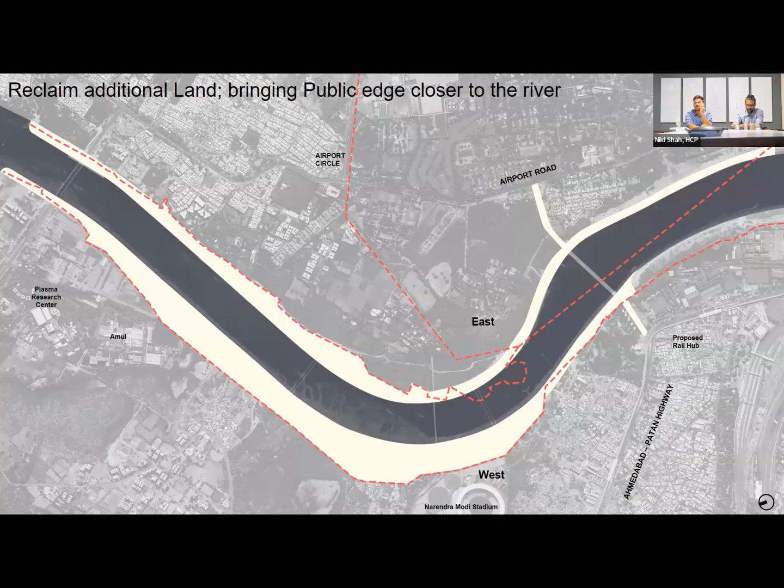So this is the river in its natural stage, and this is the river land that was marked into the development plan. Finally, when we channelize it, there is close to about 1.5 square kilometers of land that we are getting. And this is the cross section.

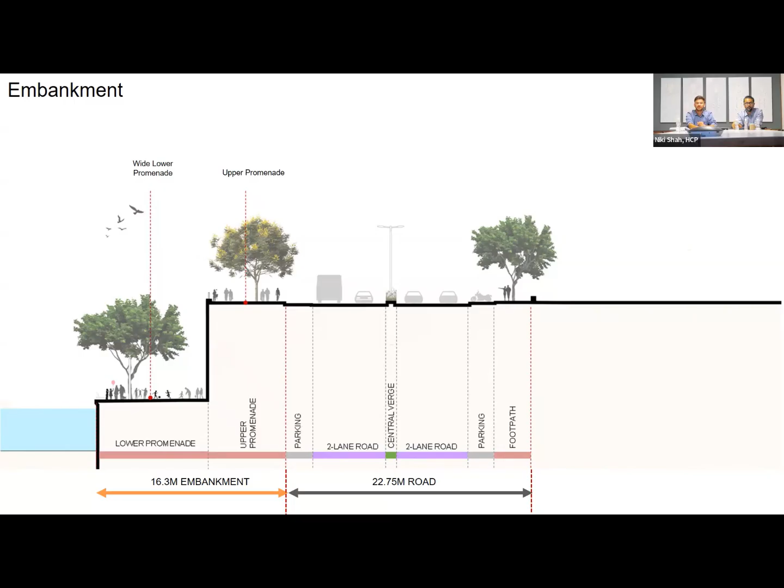We also tested out sloping embankments, but what we found out was, since this is right next to the river, if we can have usable green spaces next to the river edge, it might well be an attraction for people to gather into. So this became our design philosophy, and this was the first iteration that we made.

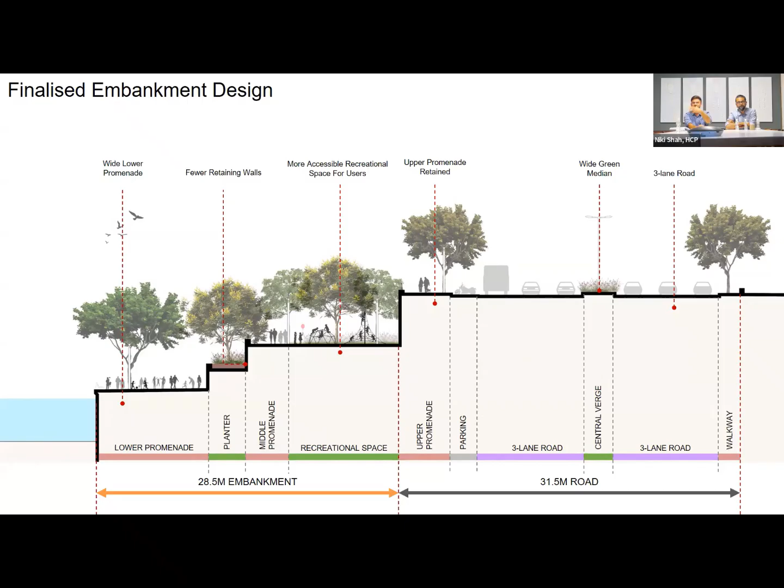Subsequently, we decided why not just decrease the number of planters and increase the number of green linear parks. Planters are where dedicated green spaces are there, and the middle promenade is a complete linear park now.

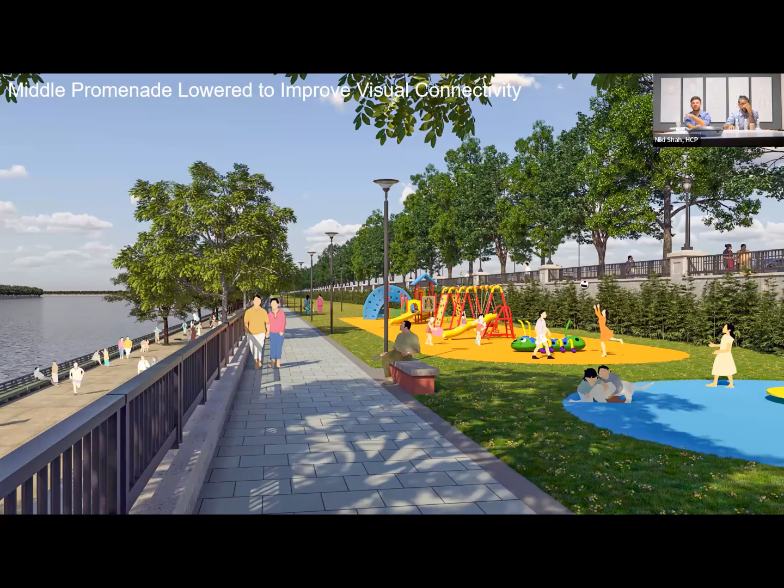Now here, there's a 100-year flood line which we have to respect. This is a technical aspect, but we had to respect it, because then the flood would enter the city. One improvement we've done in this phase is largely because of a political decision that was taken: when a 100-year return flood happens once in a blue moon, it can flood the river road, the river street that runs right next to it, but the city can still be protected by having a last wall. By doing this, we have managed to cut that wall down by half. So the city is still protected from the flood, but there's no disconnect happening between the riverfront, the embankment, and the city itself, and people can also enjoy the river from the upper promenade and the street.

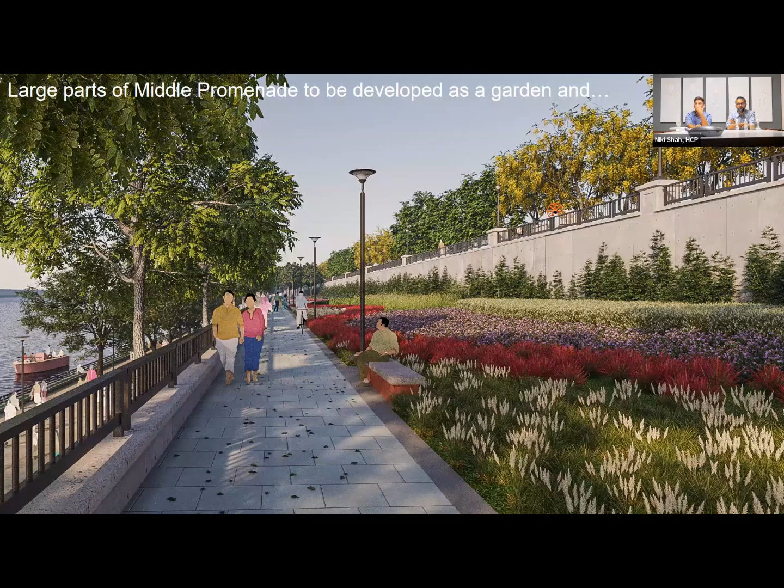So these are some of the isometric views. This is how the terrace garden would come up with smaller accesses in between as activity nodes. The middle promenade, if you see, has been visualized to have activity pockets in between, curated landscapes like this, and forested areas like this with a lot of lush greenery.

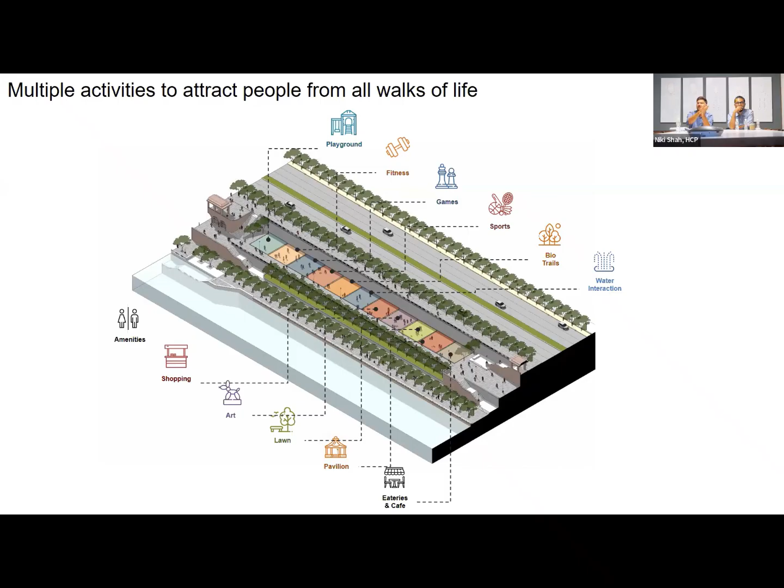Also, where your Olympic complex is coming or where the plazas are, we can have activities of different sorts - there can be tot lots, sport areas, water interaction places, or pavilions of different sorts like this. So keeping the embankment still active, but at the same time a very, very green edge, because we have the land for it.

And all of this doesn't have dedicated storm water - it is just designed as a sponge park, so water can percolate right down to the embankment.

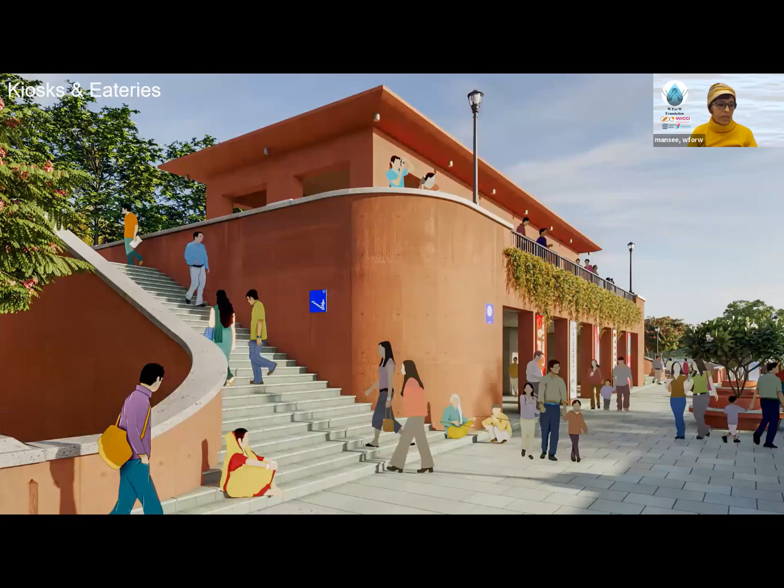We can also have sports areas and game zones and different sort of activities, fitness areas, so people can actually come to the riverfront and enjoy this. Kiosks and eateries, plazas become a hub, kind of a local hub for people to gather into. We can also have eateries inside them, protected from the river edge.

We have different types of plazas coming into picture. It's not one design that is repeated everywhere, but we have iterations of similar modules that come into play, and then different outcomes are happening depending on what context this accessibility offers.

Yeah, sorry. I won't take more than 5 minutes if that's okay. Sure, please, because we have to really take questions from people. Parth is still there. I'm largely done with it.

So these are the on-site photos of the execution work now. The red concrete that you see is now the access points that are coming into picture. Half of the embankment is already constructed now.

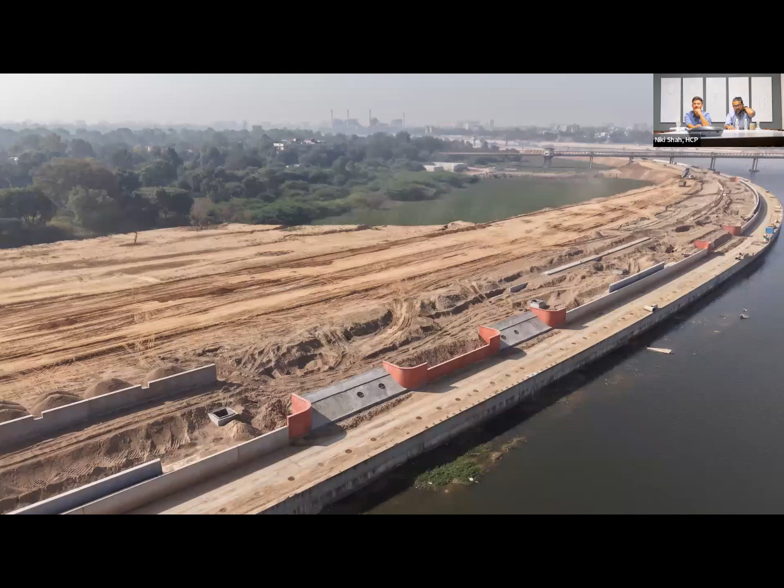Wow, this is the Gandhinagar stretch, right? Towards Gandhinagar. Still in Ahmedabad, up to Indira Bridge. Still in Ahmedabad.

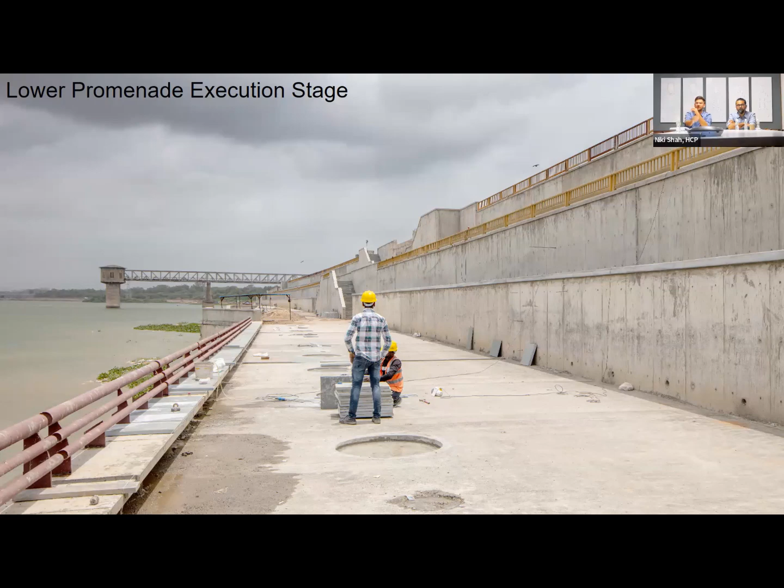We are very happy and proud to tell you that this is how the on-site progress of the landscape is also happening. So this is fresh during construction. This was just after 8 to 10 months when greening was done. This was after 14 months, so you see a lot of flourishing landscape. This was the lower promenade.

The middle promenade has undergone a similar timeline and progression. This is during construction, after 5 to 6 months. And this is after 10 months. And this was during the last monsoon, not this monsoon, the last monsoon. And this is how it is much more greener and grown now.

It is open to the public near Dafnala, so people can visit this as well. And this is the pilot stretch now. So phase 2 is much more wider, will be much more greener and have much more activities than this. And yeah, that's it. Thanks.